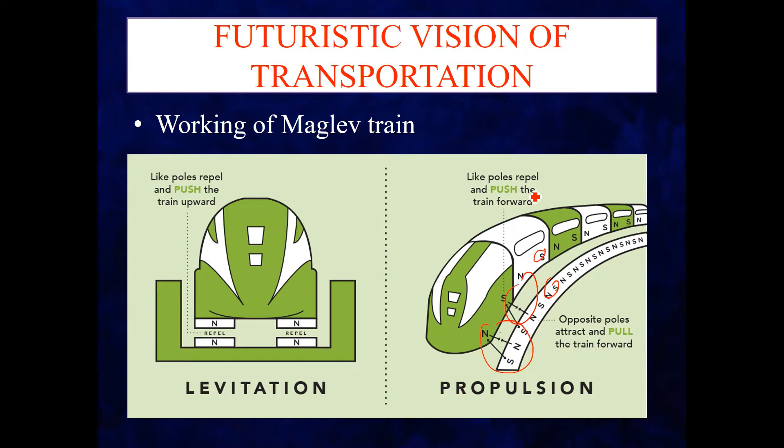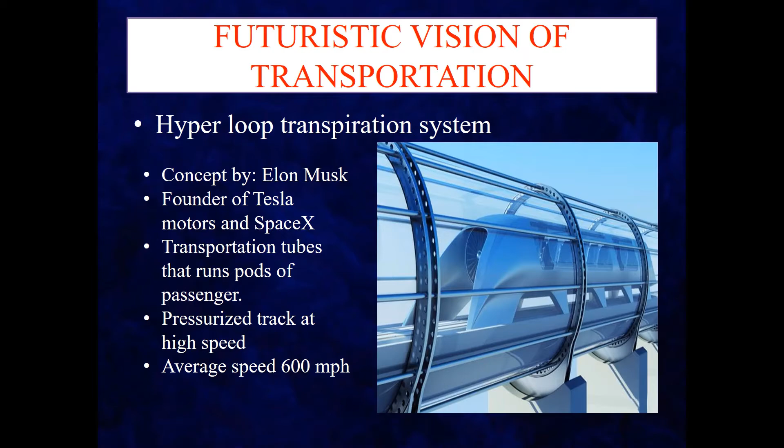In the future we have self-driving drones, then maglev trains. The working of maglev train you can see by levitation, and for propulsion we have north and south, then the hyperloop system. This is maglev and hyperloop, I will explain in detail later because there are so many details.

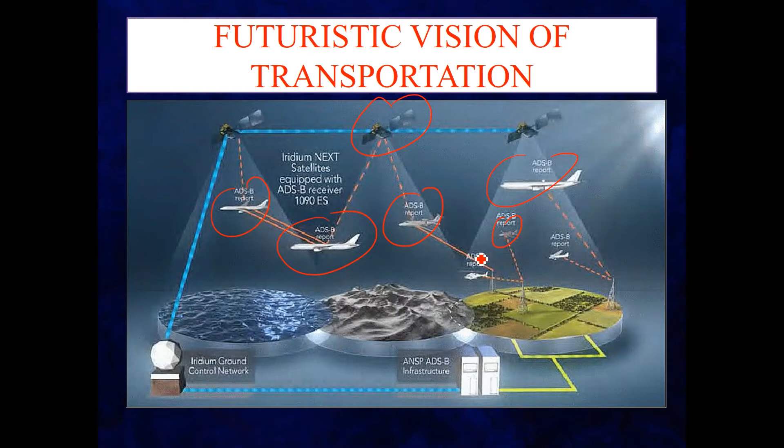Then after, satellite based air traffic control system. Here is a satellite, and air traffic means a plane. We can watch the plane by satellite.

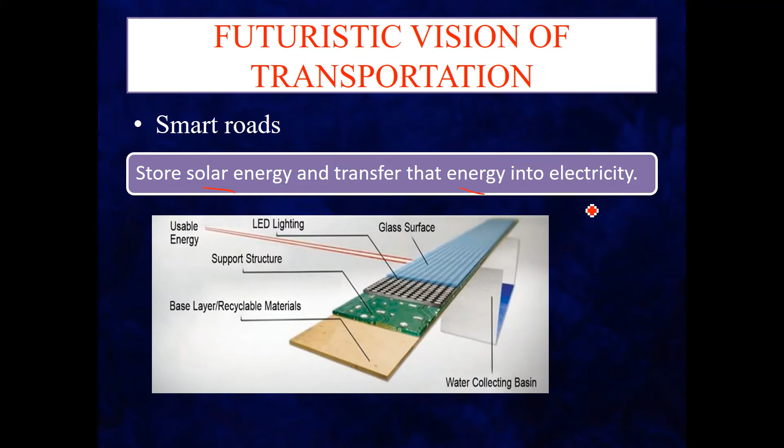Now we discuss about smart road. For the smart road we are using solar energy to transfer the electricity. We use this type of technology.

In the future we have a glow-in-the-dark type road, which uses photoluminescence powder. Then after, interactive light we can use in the future. Then after we can use melt snow by electricity. And for the future we are going to reduce traffic accidents as well as government spending on roads, we are going to reduce both these things.

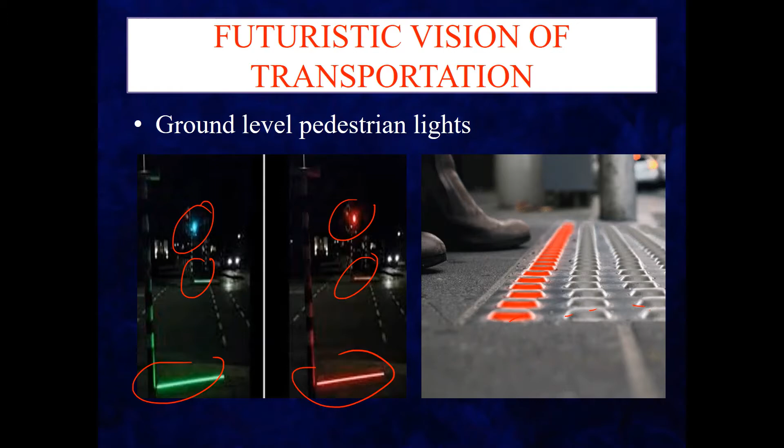Now we have some technology we can use in the future, like ground level pedestrian light. You can see here this light at ground level, and this will combine with traffic, you can see here is the changing light, it's called ground level pedestrian light. Then after, in the future, bicycle share programs will increase. Bicycle share program means you don't have to buy a vehicle, there is a bicycle we can use on rent.

Then after, smart future roads, we have technology like this, we will discuss it all in detail. Like glow in the dark, the first technology we discussed, we use luminous powder, and this will glow for 8 hours. It will charge in the daytime and glow in the night time.

Interactive light means when a vehicle approaches, the light will glow up.

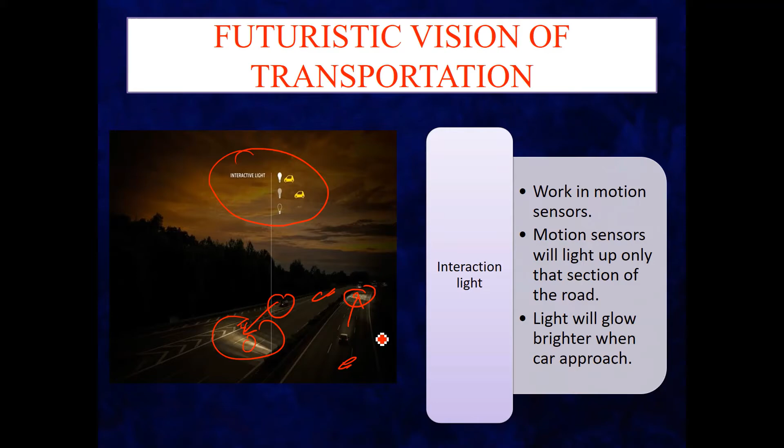So this type of light we can see in the future. After wind power lights, street lights use their own power generation by using a wind turbine. By using a wind turbine, it's called wind power light.

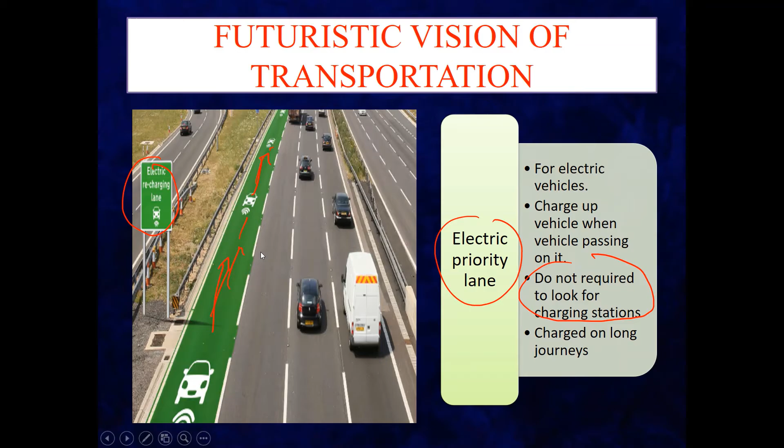Then after kinetic road, we discussed in the previous lecture. There is an Italian startup which converts kinetic energy produced by moving vehicles into electrical energy.

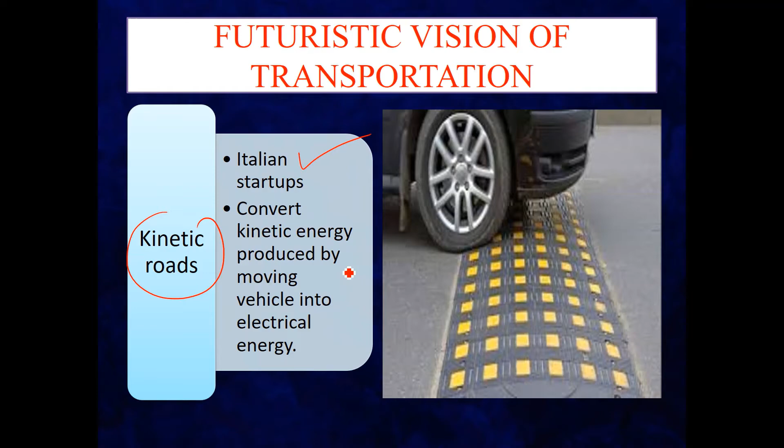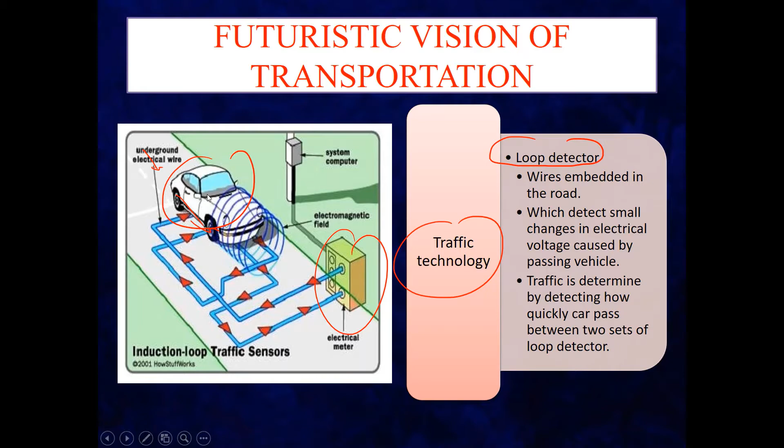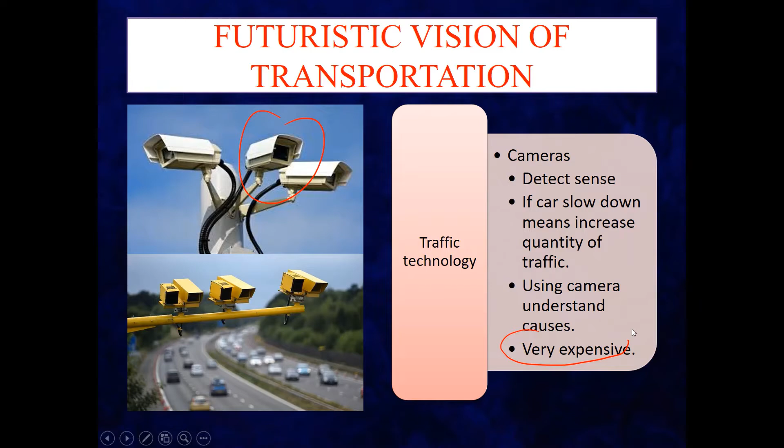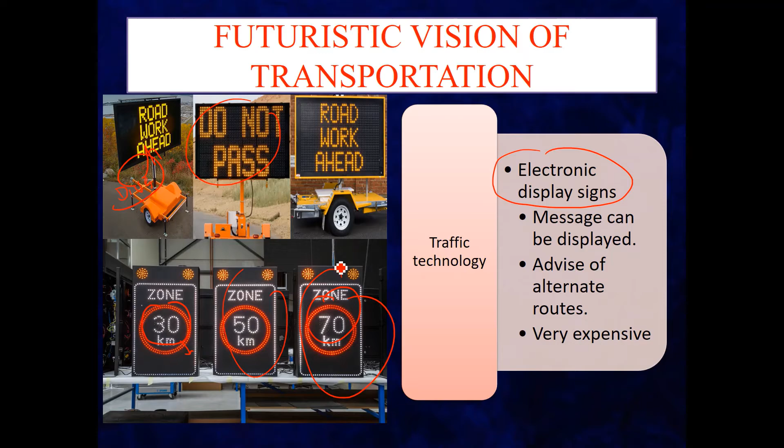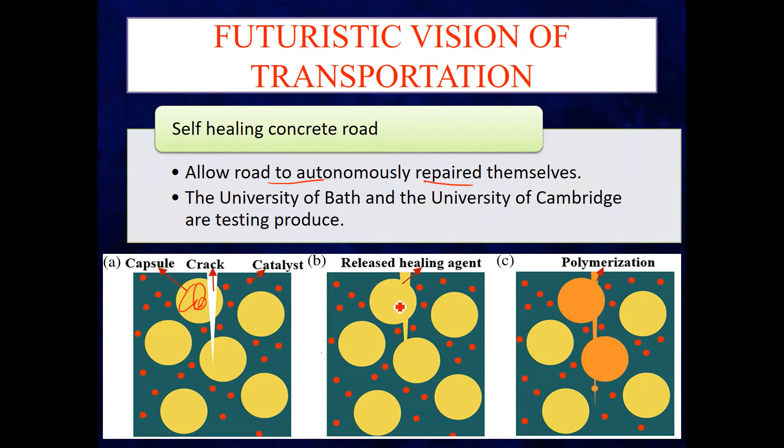Then after, self-healing concrete road - you can see here there is bacteria in the concrete, and this automated road automatically repairs itself. This bacteria contacts with water and generates a slurry, and this slurry fills the crack.

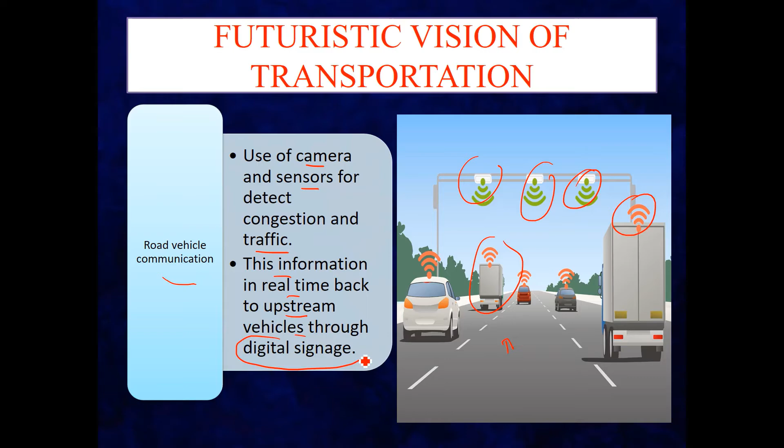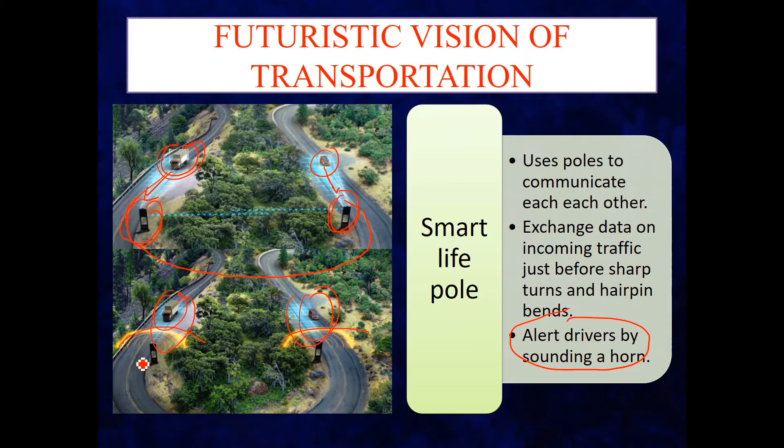You can see here this blow horn alerts the vehicle driver that there is another vehicle from the opposite direction.

So, advantages of smart roads: smart road enables autonomous vehicles, they generate electricity, smart road increases safety, driving faster and saves time, reduces congestion, reduces pollution, and helps conserve the environment. These are the advantages of smart road.

But there is one disadvantage, which is that it's expensive, and we also need to upgrade it periodically over time.

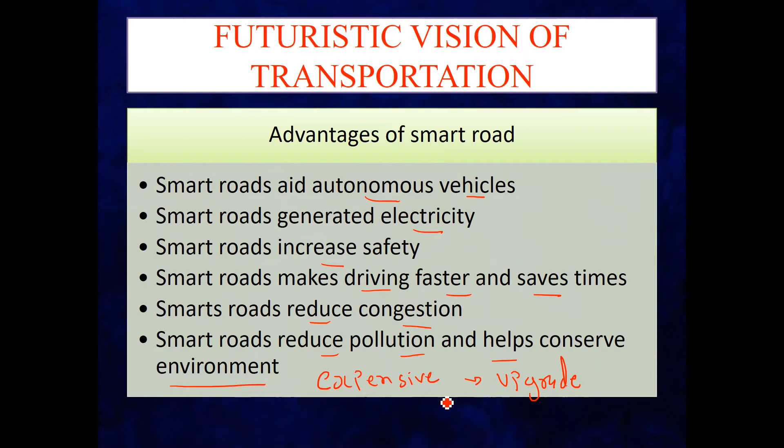Now we are talking about smart future railways. First we have a driverless train. Driverless train means we are using technology to run a train without a driver, a self-driving train. This uses an automatic train operation system, and there is a computer that monitors and corrects it using the automatic train protection system. This is called driverless.

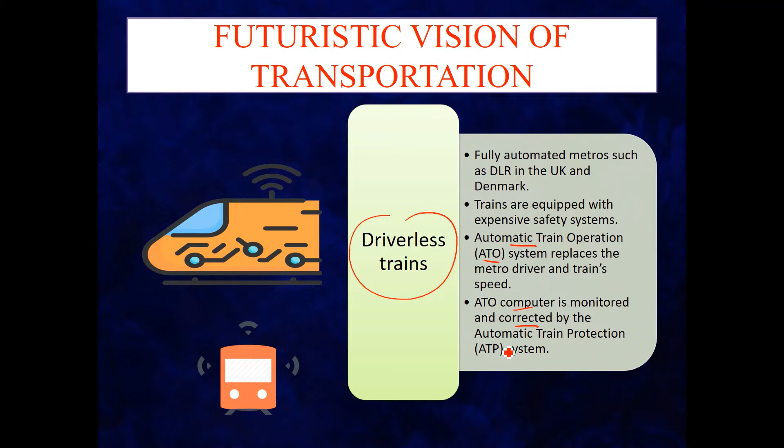Second is hydrogen train. Hydrogen train means we are using hydrogen as a fuel to produce electricity, and this electricity runs the train. In the hydrogen train we have a hydrogen tank which is used for storage of hydrogen, and using this hydrogen we generate energy through a fuel cell. We store hydrogen in the tank, the fuel cell generates electricity, and this electricity runs the train. We have a byproduct which is water.

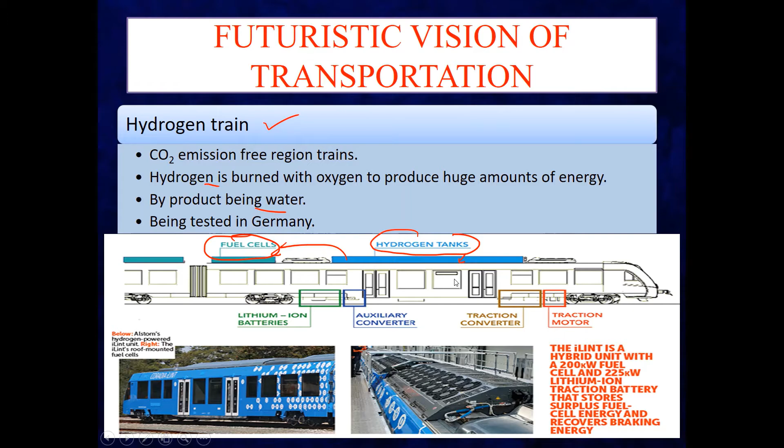Now maglev train, simply called maglev train. In magnetic levitation, we have two sets of magnets. One is for pushing the train along the track, and the second is to move the elevated train ahead. We are using two sets of magnets, and there are no moving parts, no wheels used for maglev trains. The magnets control the train's stability and speed, and this operation started in 2004.

So we have three types of maglev trains. First is electromagnetic suspension, second is electrodynamic suspension, and the last one is inductrack.

First is electromagnetic suspension. Just a change in the location of the magnet, and the types will be changed. There is attractive force in this we use, 1.3 centimeters above the guide rail, so the train will be increased in height by 1.3 centimeters only, using the electromagnetic suspension method.

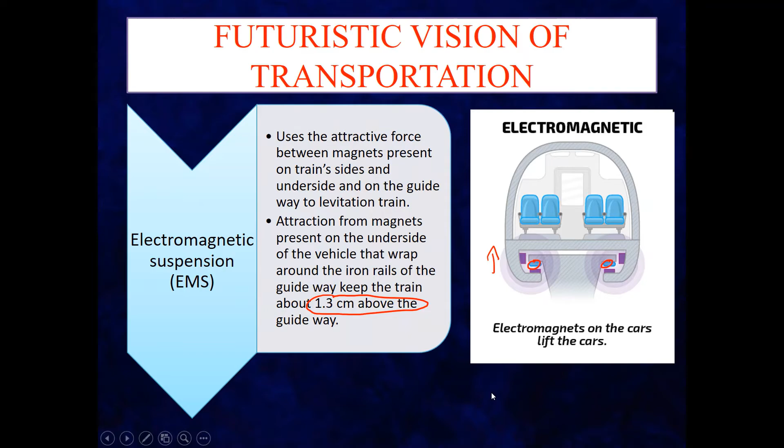The second one is electrodynamic suspension. There is a location of the magnet that is changed. The magnet will be the same, but just a change in location will change the type. There is a simple purpose, used for levitation. In the electrodynamic method, 1 to 10 centimeters of height will be increasing.

The last one is inductrack. Inductrack is developed in Indore, Madhya Pradesh. Here only the magnet location will be changed, and we are using a wheel on it. This height will be increased more than 10 centimeters. These have been developed in India.

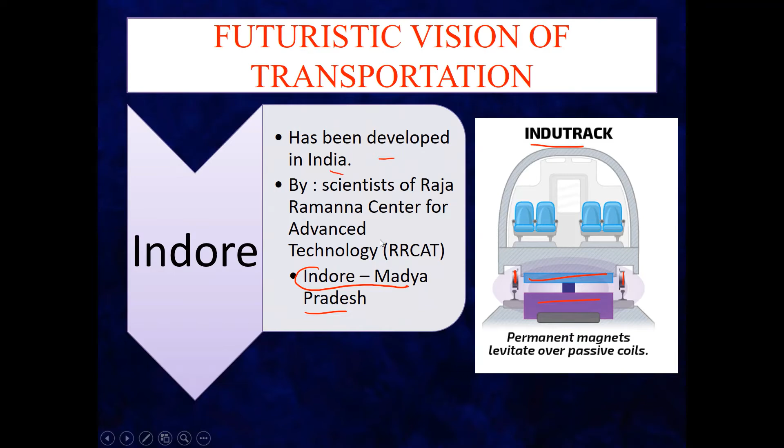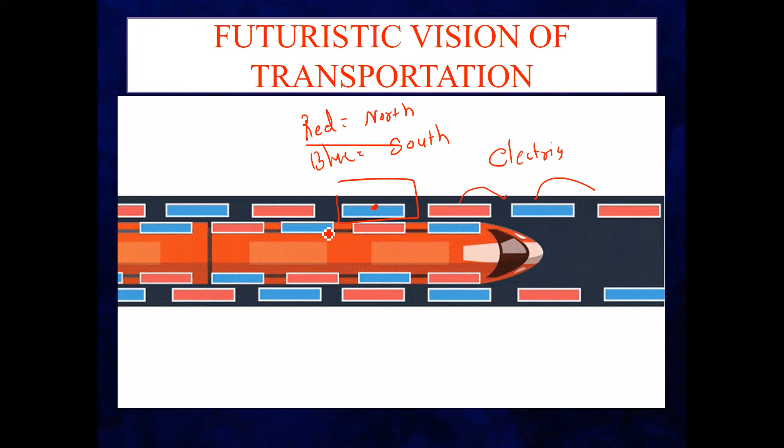Now you can see here is a GIF, so you can see how the maglev train works. Assume red is north and blue is south. You can see here, one is red, then after blue, then again red, again blue. This happens by electricity, changing the north and south poles by electricity, and this attracts the train's magnets and the train moves.

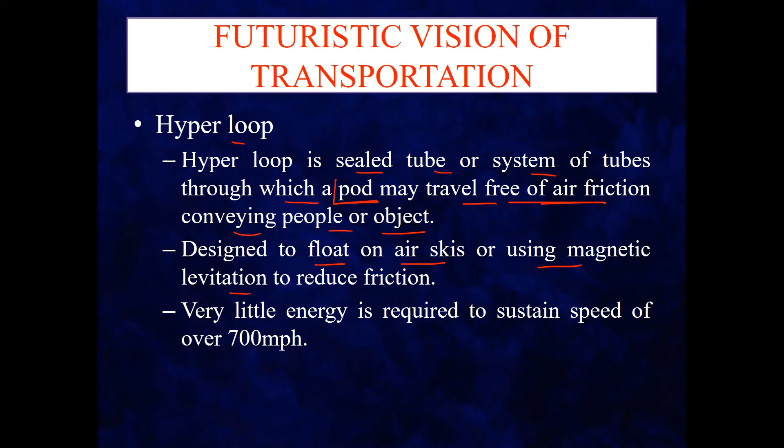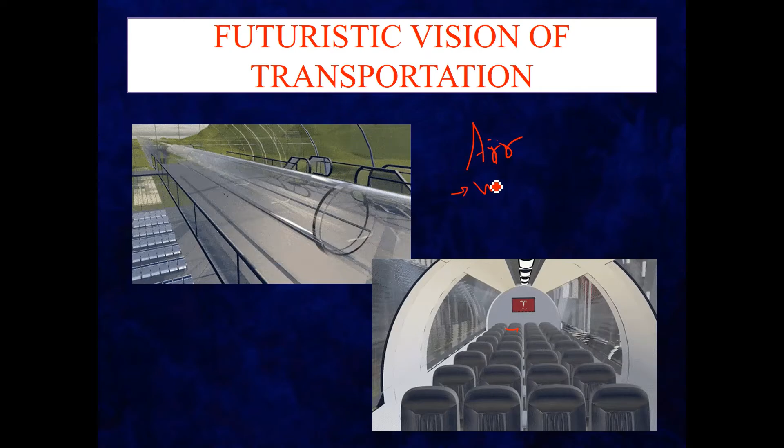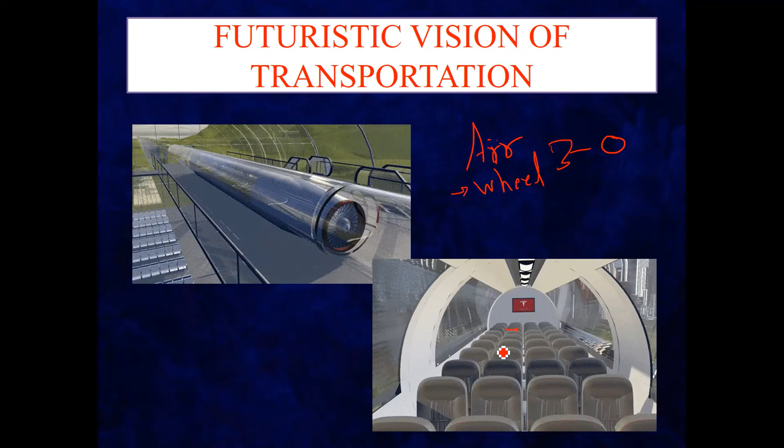After that, hyperloops. Hyperloop means a sealed tube or system of tubes through which a pod may travel free of air friction, conveying people or objects. This is designed to float on air skis or using magnetic levitation. In the hyperloop, we are using magnetic levitation. You can see here are the tubes we have, and by this tube, our hyperloop generates vacuum in the tube, so there is no air friction on the pod, and by levitation there is no friction at the wheel. So we can assume theoretically there is zero friction on the pod, so we can increase the maximum speed of this pod. This is called hyperloop.

Now metro. Metro is suitable for metro cities or metropolitan areas. This is high capacity and most efficient in terms of energy consumption, space occupancy, and number of people transported. The train is specifically designed to run in metropolitan cities. Simply, metro is used in the metropolitan city. There is no use for longer distance transportation, this is used only for transportation inside the city.

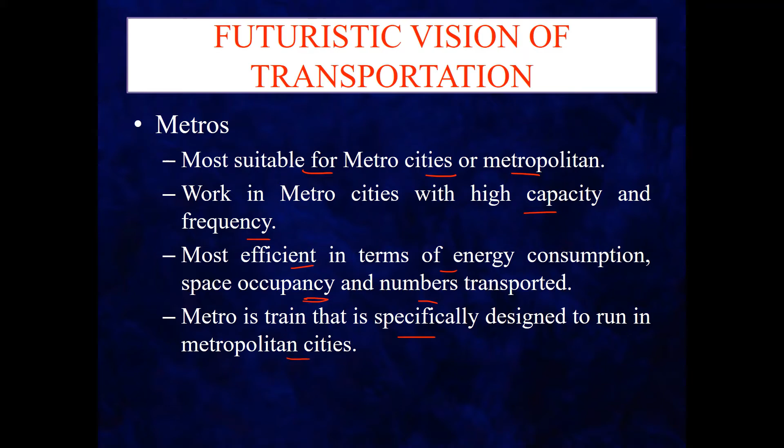We have discussed about Ahmedabad Metro, which is built by Gujarat Metro Rail Corporation Limited, which aims to implement all metro projects in Gujarat. So this construction company, the Corporation Limited, is built only to implement all metro projects in Gujarat.

Now phase 1, which is under construction. Total length is 40.03 kilometers, of which 33.5 kilometers is elevated and 6.53 kilometers is underground.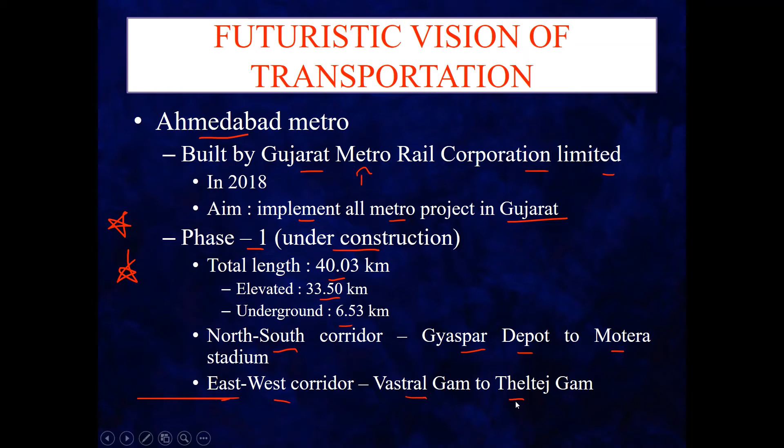We have two corridors: the north-south corridor connecting Gyaspar Depot to Motera Stadium, and the east-west corridor connecting Vastral Gam to Theltej Gam. These are the two connections.

Then the second phase is approved. It's not under construction but approved, and the total length is 28.25 kilometers.

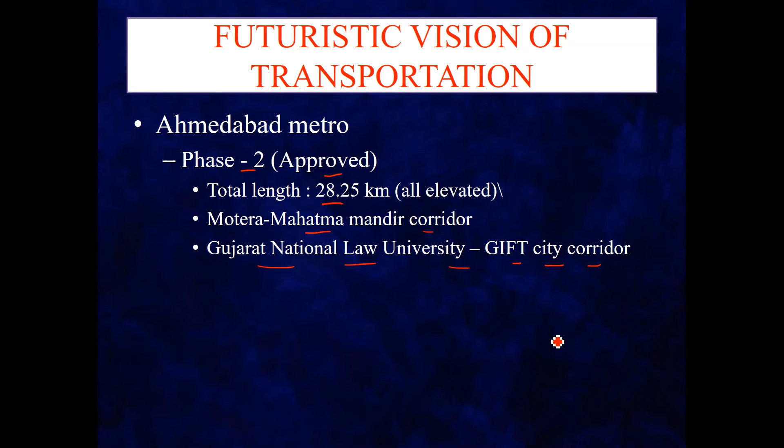The Motera-Mahatma Mandir corridor to Gujarat National Law University, and connecting to GIFT City corridor. These are part of phase 2, which is approved.

Now we have 10 cities in India which have a metro railway in operation: Kolkata, Delhi, Bengaluru, Gurugram, Mumbai, Chennai, Jaipur, Kochi, Hyderabad and Lucknow.

Advantages of metro train: it is most efficient in terms of energy consumption, space occupancy and numbers of passengers transported, with very high volume during peak hours. It causes no air pollution, much less sound pollution, low energy consumption, carries much traffic, has very low ground space occupation, and reduces journey time. These are the advantages of metro train.

Now we are going to discuss the future vision of airports. We have two aspects: first is innovation in technology, and second is security.

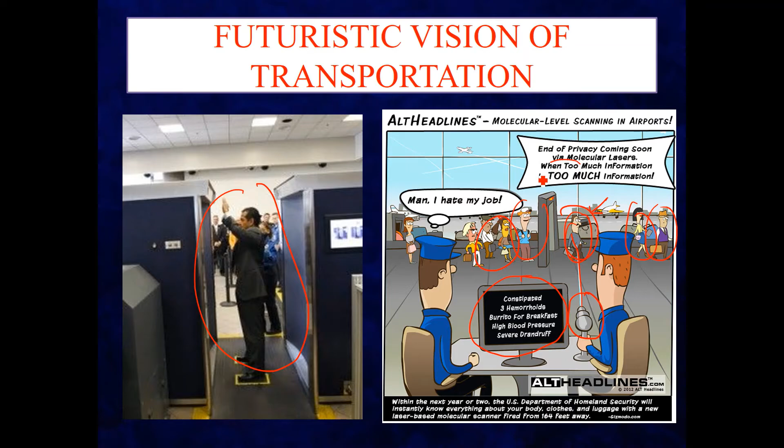But there is so much information from that. You can read it here. For example, it shows a constipated human who has eaten a burrito. So anything about this human you can see here.

Now second is biometric scanner. A biometric scanner means we can scan facial features, iris patterns, and fingerprints. It's called a biometric scanner.

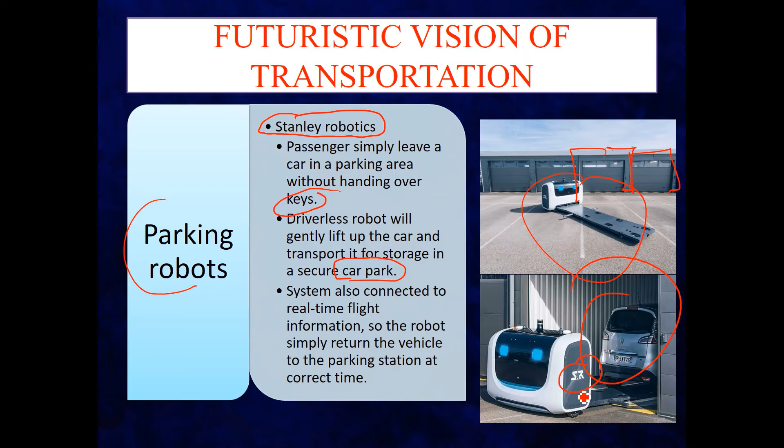Now, driverless and automated vehicles. These are used inside the airport to reach our planes. We use buses for transportation from the airport to the runway, and this bus will be driverless. So this type of technology can be used.

And the next one is translation technology. Imagine an airport where people come from so many countries speaking so many languages. If you don't have knowledge of these languages, which can number around 40 used at the airport, how do we communicate? At that time we can use this new technology developed by Google, called Pixel Buds with Bluetooth, which translates 40 languages and can be used in an airport for communication.

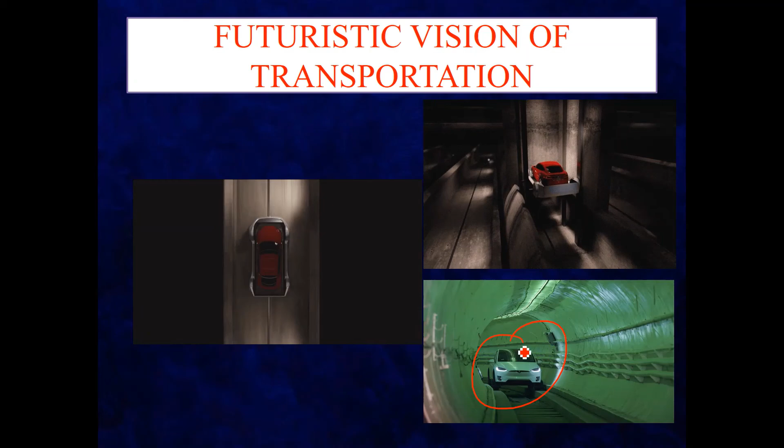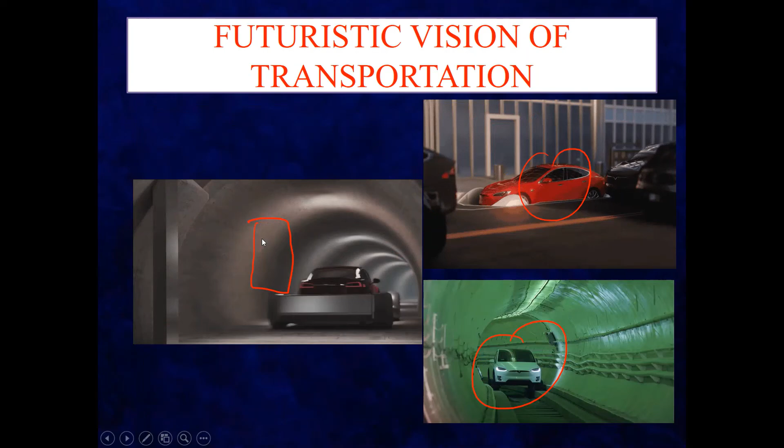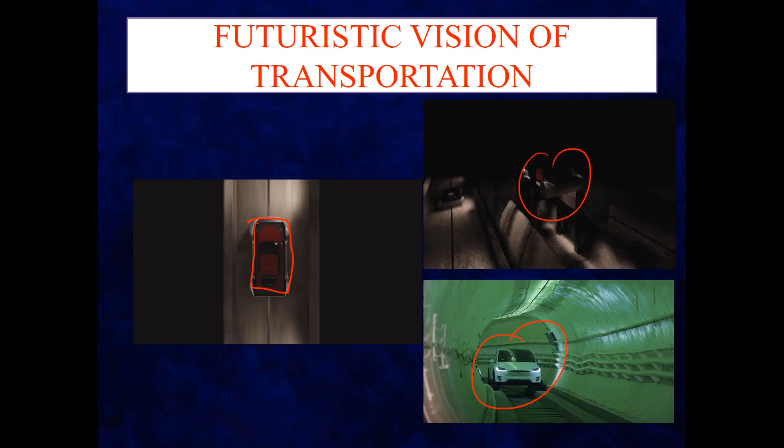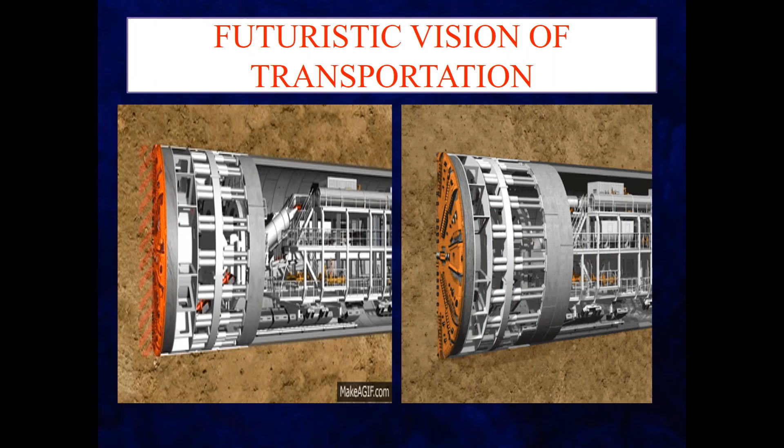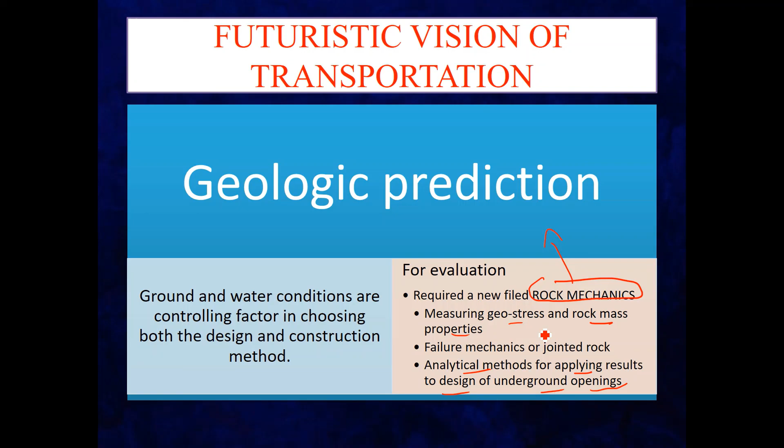Now we have to discuss tunnels, how we can bore tunnels. You can see this GIF. As technology improves in the future, we have to use geological prediction, meaning we use a new field, rock mechanics. With this mechanism, new technology, new theory, new field, we have to learn and understand rock mass properties, geostresses, and analytical methods for applying results to design underground openings. This new field is called geological prediction.

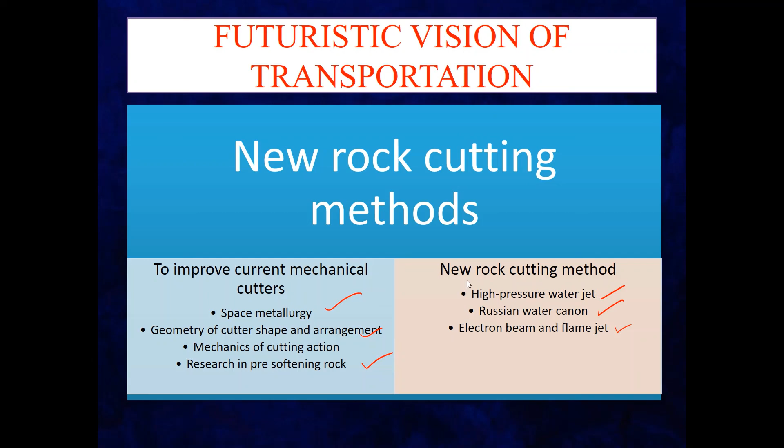Then new rock cutting methods: we use high pressure water jet, Russian water cannon, electron beam, and flame jet. This is the rock cutting method we can use for tunnels.

Material handling system: we are using long belt conveyor, high speed rail, and hydraulic pneumatic pipelines. These schemes are now under study, so we can use them in the future.

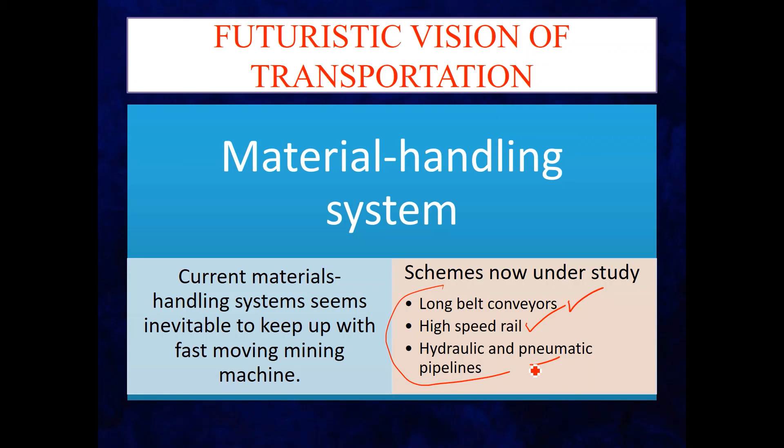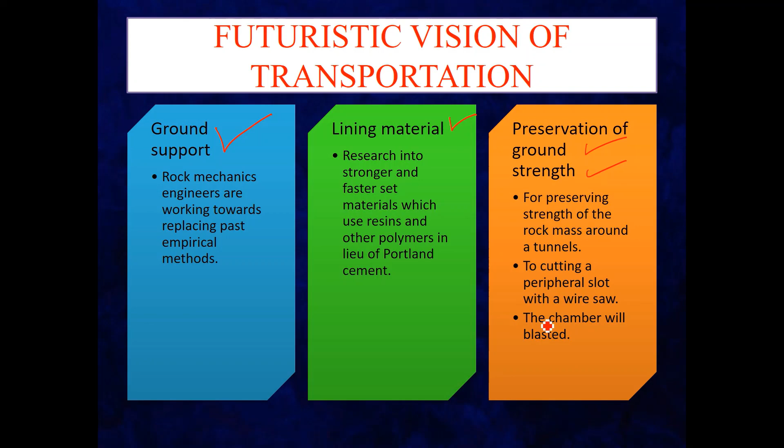Then we have to improve ground support, lining material, and preservation of ground strength. This technology we have to improve.

Now we have discussed underwater tunnels. We have two underwater tunnels. The first is between Hokkaido and Honshu Island. Honshu Island is a part of Japan, and this is the longest railroad tunnel, 34 miles. The second one is between France and England, called the English Channel Tunnel.

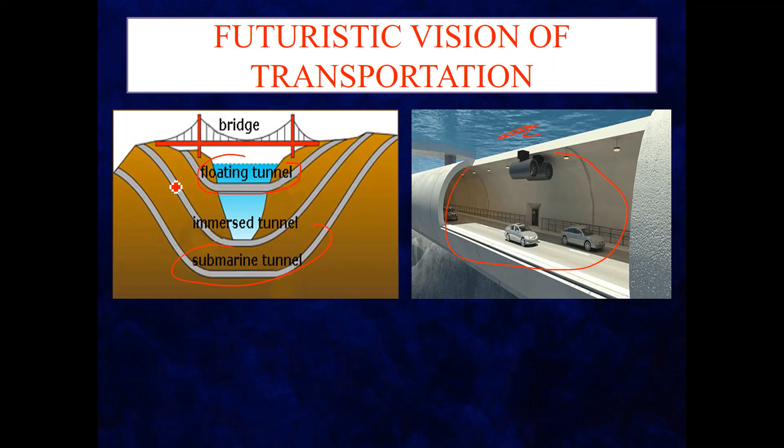You can see here is underwater, here is water, and here is a tunnel. So we have three types of underwater tunnel. First is a floating tunnel, second is an immersed tunnel, and the third is a submarine tunnel. It just depends on the location of the tunnel, but we have to discuss floating tunnels.

Look at here, there are two types of tunnel. First is using a pontoon, and second is using a foundation. So submerged floating tunnels include suspended tunnels, Archimedes bridges, tunnels that float in the water. That is simple, floating in the water.

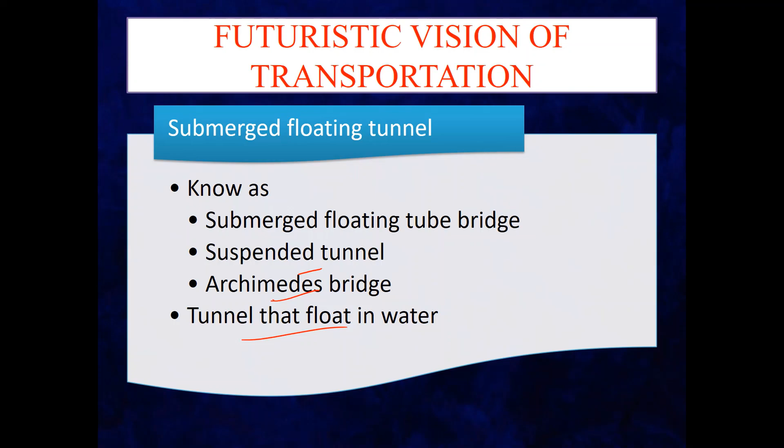So we have a basic principle, two ways for floating tunnels: first is positive buoyancy, and second is negative buoyancy. By this figure you can see one is positive and the second is negative. This pontoon we call positive, and this is negative. Simply, positive buoyancy is fixed in position by anchor, meaning by tension. So using a pontoon we get positive buoyancy, and using a foundation we get negative buoyancy.

So there is a relation between buoyancy and self weight which is very important. We have to maintain this balance.

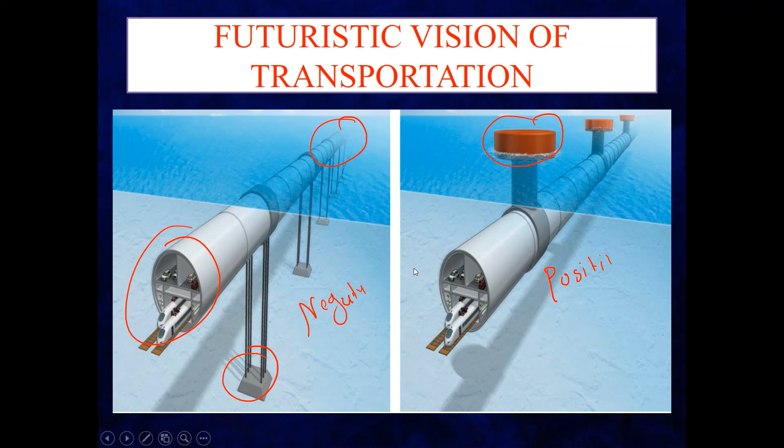Now I give some practice questions for you. Enlist a futuristic vision of transportation and explain any four. Define smart railway, explain maglev train, hyperloop, and explain submerged floating tunnel. Now I change the question here: explain futuristic vision of road transportation and explain any four. So it is a practice question.